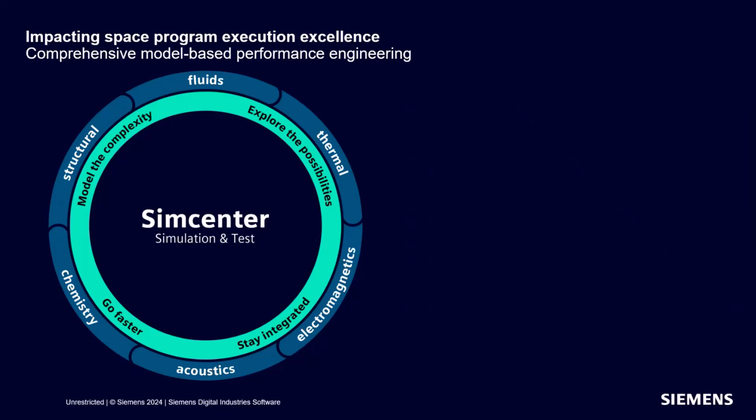Simcenter as a portfolio is well positioned to support the booming space industry, as it provides both simulation and test capabilities around a wide range of physics: structural, fluids, thermal, electromagnetics, acoustics, and chemistry. In the context of spacecraft performance engineering, it allows us to cover a wide range of applications: propulsion performance, structural, thermal, and robots engineering, electromagnetics performance, testing, verification, and qualification, and also safety and mission assurance.

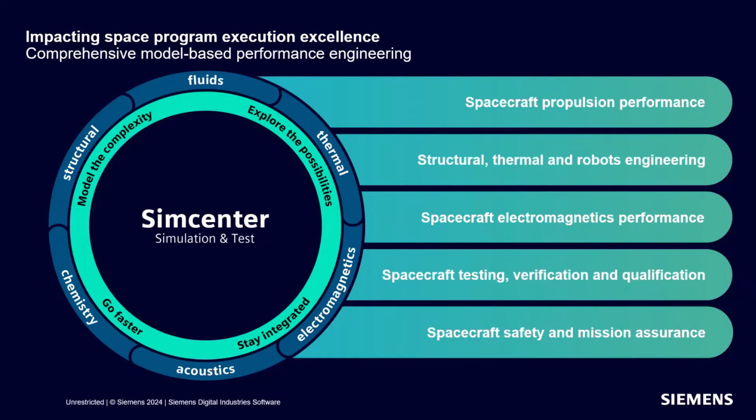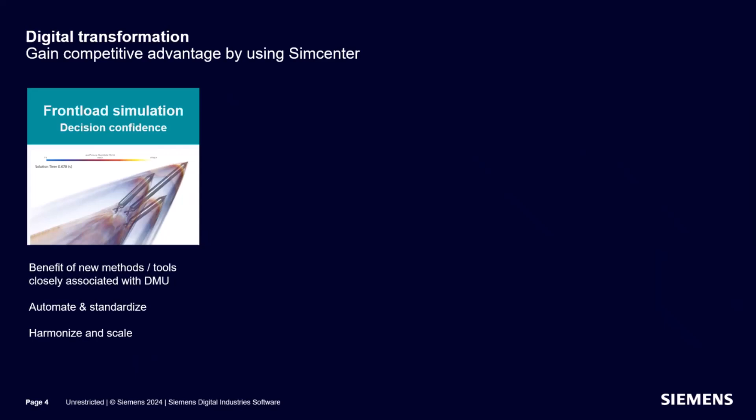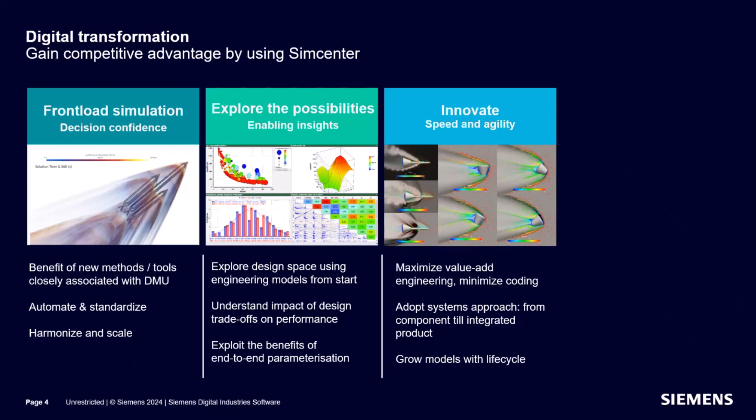We typically articulate these applications around a number of values. We allow to increase decision-making confidence by front-loading simulation through automation and standardization. We also improve insight by exploring the possibilities through DSE or through combined use of simulation and test. We can innovate faster by maximizing engineering value, thereby improving speed and agility. And we assure our simulations are credible through linking them with test and the wider program, like MBSE or verification management processes.

As a first topic, I'd like to illustrate how credible simulations are performed in full alignment and in a traceable way with test, and how this can help accelerate the qualification testing process. The first way we assure credible simulations is by bringing together simulation and test like nobody else. Historically, we have had a strong position in structural dynamics, both testing and simulation, and we have invested in solutions that help to both do upfront de-risking of the test and also correlate results afterwards.

We have also recently led the way in reducing the cost of acoustic qualification testing by bringing to the market a set of simulation and test products that enable direct field acoustic noise testing.

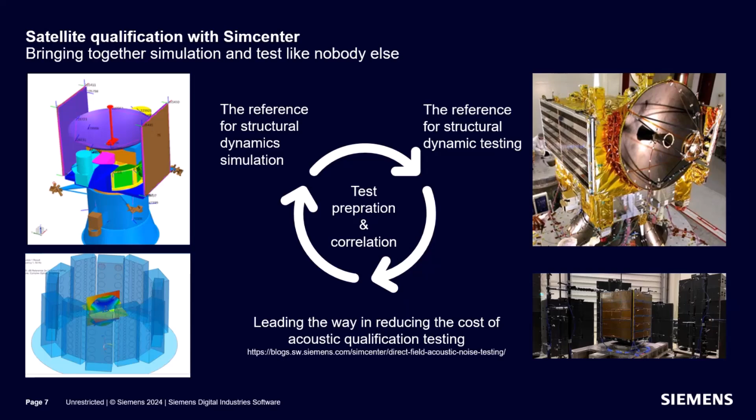We continue to mature this hybrid use of simulation and test, allowing us to move, as described here, to a more simulation-driven product development way of working, where targeted tests are done to validate the simulation-driven approach to building a product. We have the solutions in-house to support the deployment of a credibility assurance framework that allows to move to this more simulation-driven way of working, as described by Dr. Javed Fatemi from Airbus Defence and Space in his paper on building credible simulations for qualification of space launch vehicle structures.

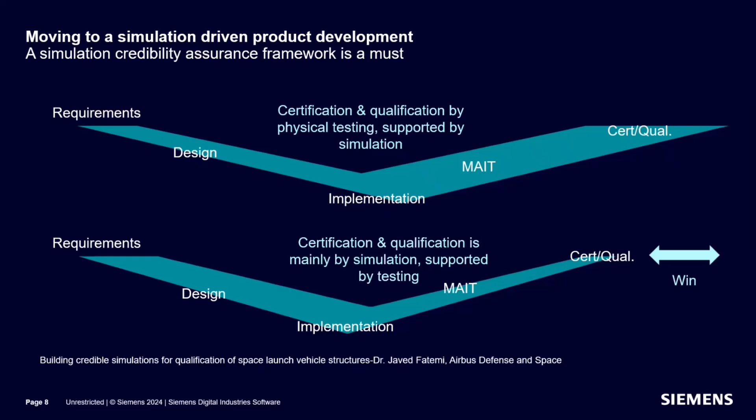As a second, we will illustrate how we increase decision-making confidence by front-loading simulation through better automation and standardization of tools and processes. The application we selected to do that is run from NASA Goddard, and it talks about spacecraft safety and mission assurance. It talks about how a consistent, shared, model-based analysis tool for reliability, availability, maintenance, and safety connected to the systems engineering world helps to understand the way in which a product fails a lot faster.

It describes how several failure analysis reports generated from a single model greatly reduce the overheads in doing such analysis. Ultimately, this leads to an increased confidence of the product through a faster understanding of failure modes, a better understanding of the effect that these failures have, and the criticality that they have.

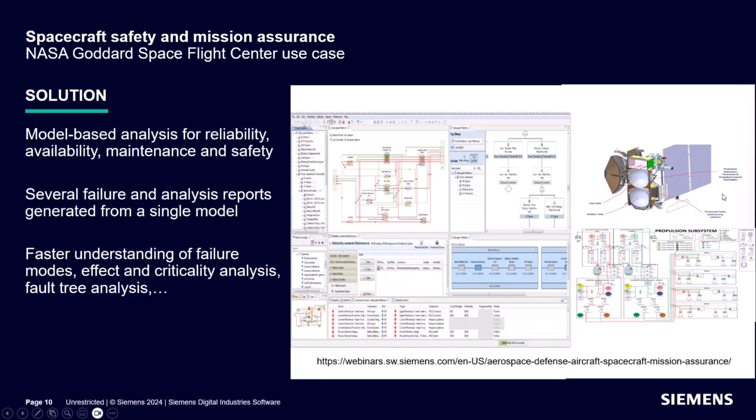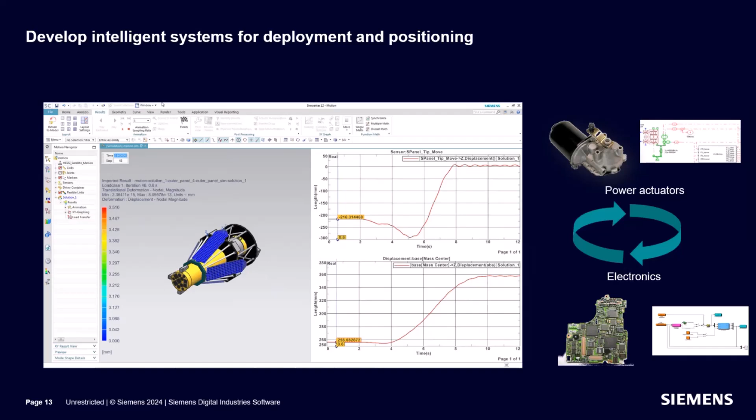The value lies therein not to optimize each of the subsystems separately, but to treat the system as a whole and optimize it as such. And that's something that the Simcenter portfolio allows you to do in an efficient way. As a last value point, I'd like to talk about how we help innovate at a higher pace by removing non-value added engineering tasks.

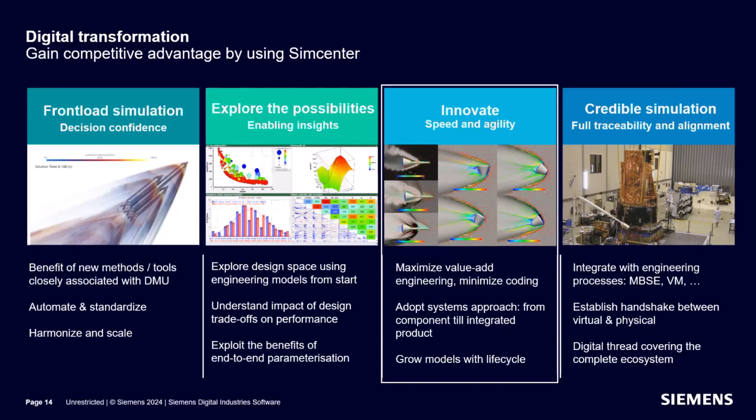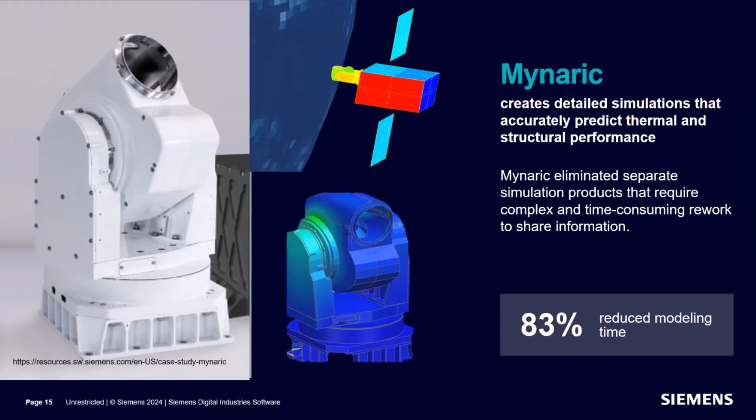To conclude, I'd like to emphasize that simulation and test is an integrated part of the Xcelerator portfolio, backed up by our support and services organization, allowing us to deploy positive change at scale.